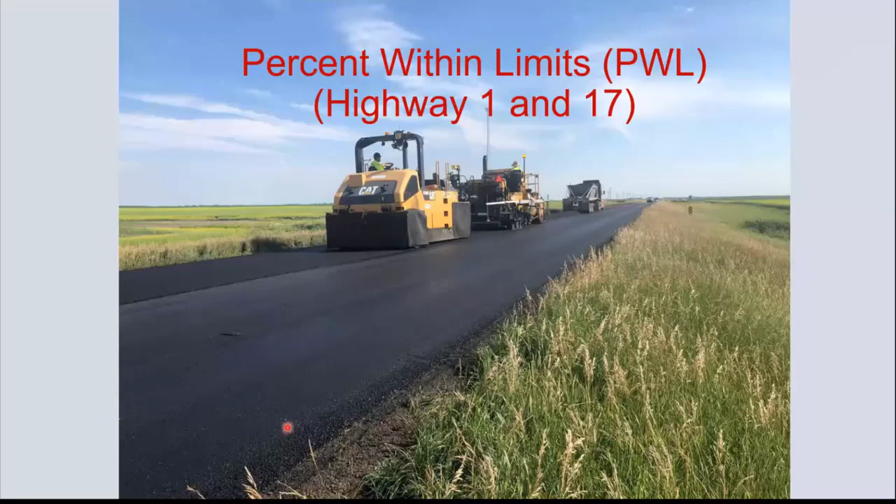Good afternoon. My name is Curtis Dunn, and I work for the North Dakota Department of Transportation in the Grand Forks District, and my position is the Highway Material Coordinator. And I'd like to talk to you today about percent within limits, and it's a new specification that we've tried on a couple of projects now in the last couple of years. And I think it would be interesting to go over some of those things that we learned for those who are going to have a project with us in 2023.

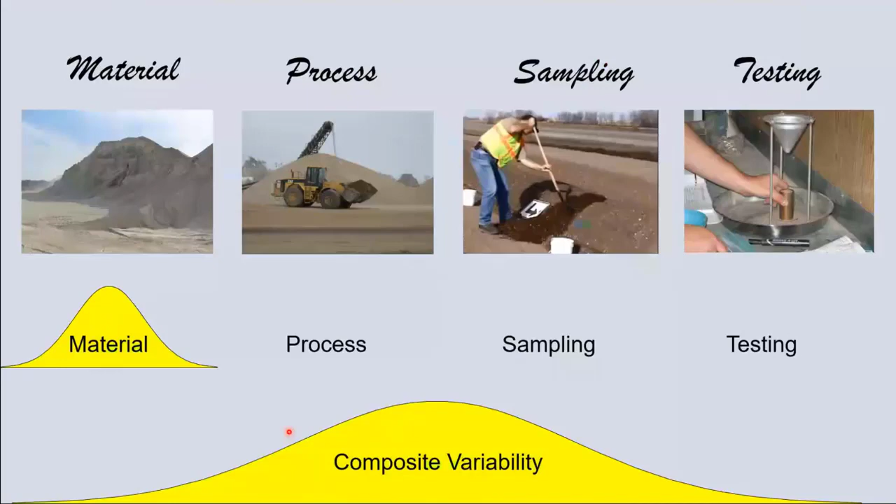To start out with, in anything we do, especially in civil construction, there's some inherent variability, and it's in the raw materials that we have in our gravel pits and in our quarries. And there's variability introduced into the process when the contractor actually starts to process the material so that it's suitable to go in our projects. And also the testing that we do, there's always a little bit of variability, and also sampling. So when you take all those four things, it actually adds up to be a fair amount.

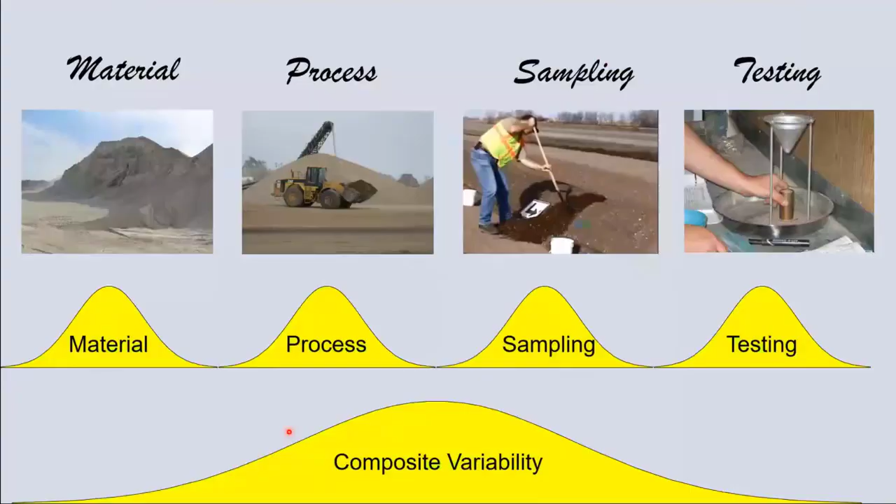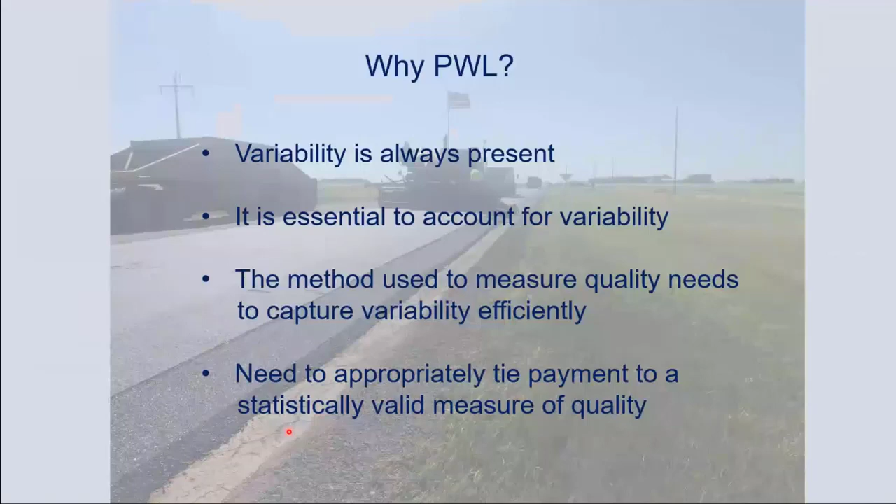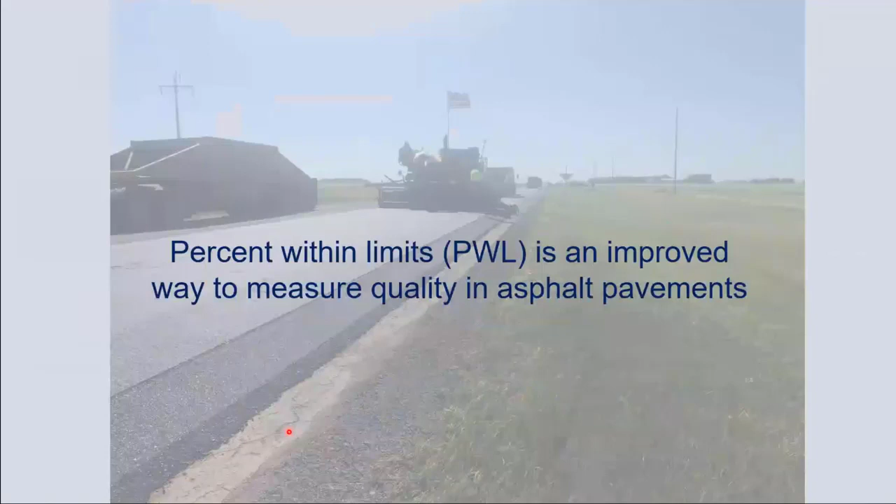And so with that in mind, since there is variability present, it's essential to account for it, to be fair. And the method to measure quality needs to capture variability efficiently, and it needs to appropriately tie a payment to that statistically valid measure of quality. And so that's where percent within limits comes in, because everything is under a normal distribution, and percent within limits works on that basis. And so it's an improved way to measure quality in asphalt pavements.

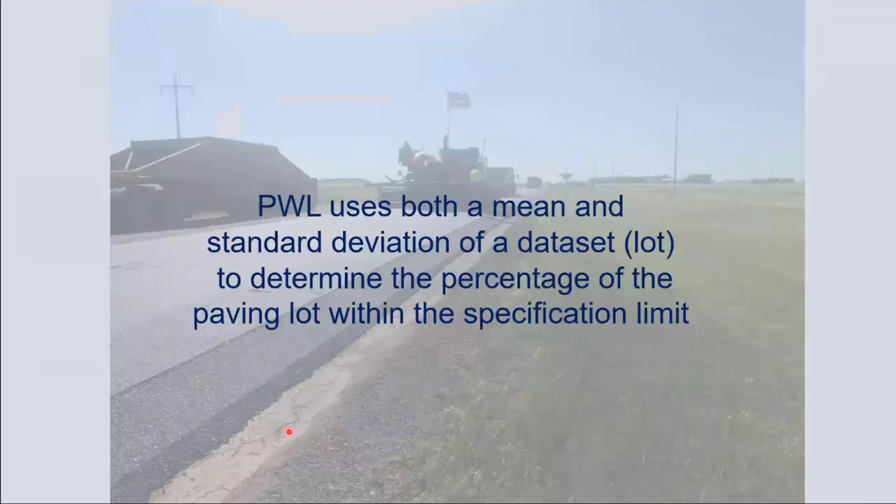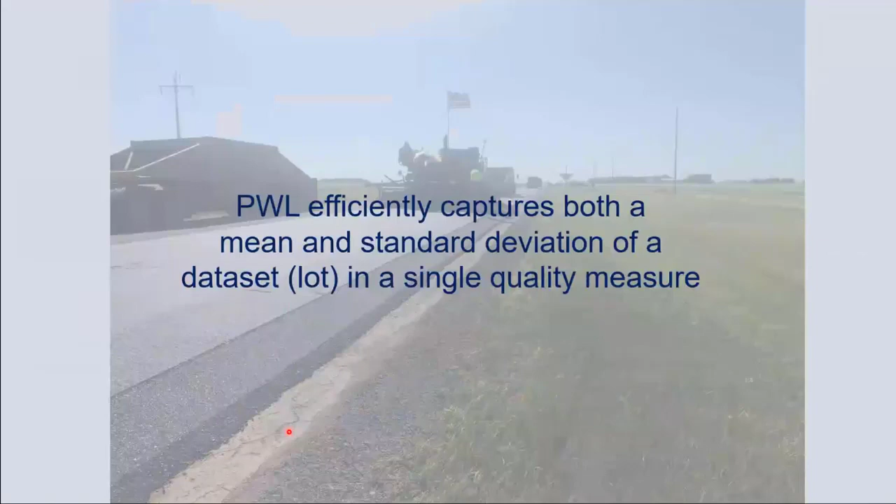PWL uses both a mean or average and standard deviation, which is the range of your data, of a data set, to determine the percentage of the paving lot within the specification limit. It efficiently captures both in one pay factor and in one formula. It captures both the average or mean and standard deviation in a single quality measure. A PWL specification encourages the contractor to produce a more uniform product.

So not only do you want average, which for years now we've been working with averages, but it really doesn't tell you too much about the quality or the uniformity of the product. What it's really doing is trying to keep that standard deviation very low, but also have a very good average as well. And so it actually encourages the contractors to produce a more uniform quality product, and it offers rewards or penalties depending on the quality of the work produced.

So as I was mentioning earlier, in a lot of our traditional specs, we always just look at average. And in the past, and this was maybe before incentives, the contractor can receive payment for meeting density when many of the cores could potentially fall below the desired target value. A lot of our projects have 91% density and 92% density. Well, if you can get an average of 92, that means that there could be a lot of cores that are actually under that minimum.

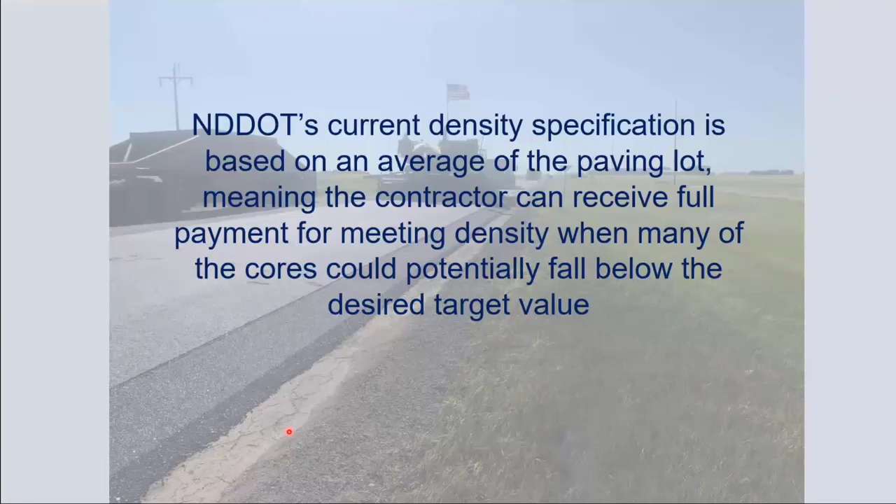The asphalt paving workbook has been now adjusted to accommodate percent within limits projects. And we're not really going to go over the paving workbook per se here today, but I thought it would be interesting to go through some of the calculations just by longhand, just to see what's actually going on and what the paving workbook is actually calculating. And there is a special provision. If you have a project this year and there's going to be percent within limits on it, it'll be in the form of a special provision.

And in that special provision, there are not only instructions about the percent within limits, but there's also a set of calculations that are in the appendix, and a table that goes along with it that we'll see a little bit later here. These calculations are actually the exact same ones that the paving workbook uses to calculate the PWL on the projects. So I'd like to go over these briefly, each step here, and actually work out an example that we did on one of our projects on Highway 1 this year.

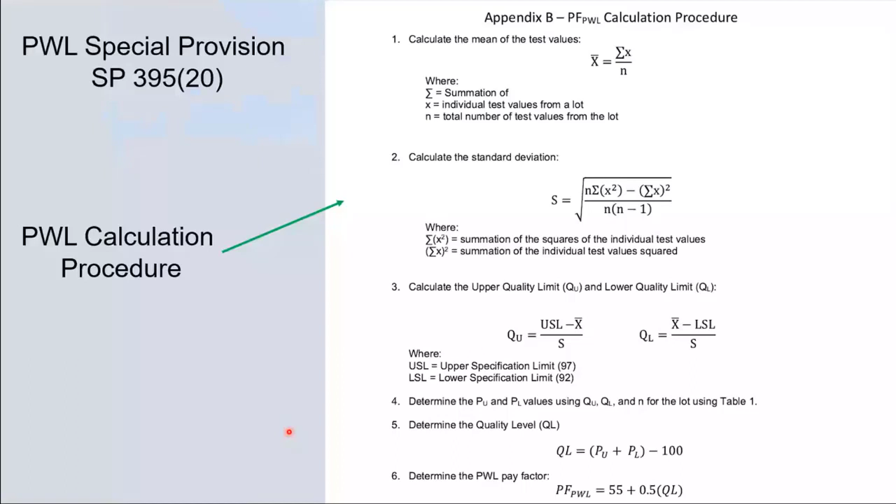And so the first part was here that there's a set of cores over to the right. We had, for a typical day here on August 11th, 21 cores. And so the first step is to actually get an average of those. And basically that's just totaling them all and dividing by the number of cores that were there, and that'll give you an average.

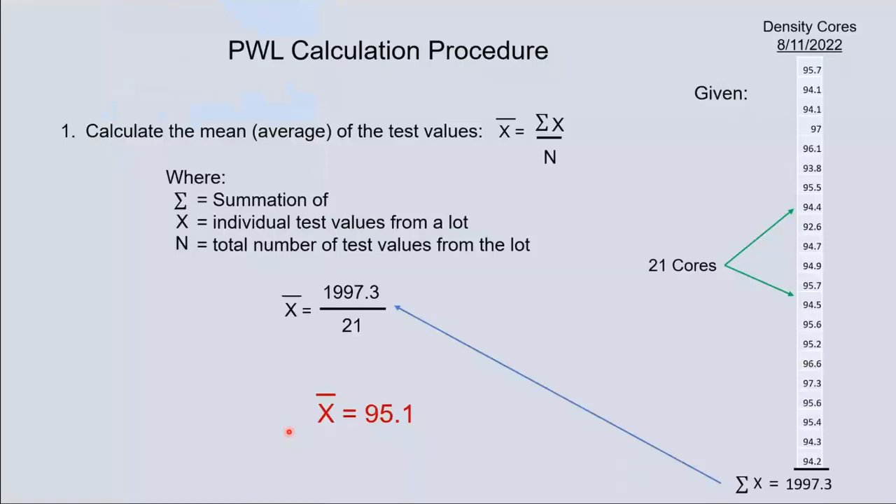The next step is probably the most complex step of the whole process here, getting a standard deviation, and that's basically a statistical formula. You use the summation of the squares of the individual test values. You also use the summation of the individual test values squared, and then you use your total number of test values from the lot. And so you can actually calculate a standard deviation.

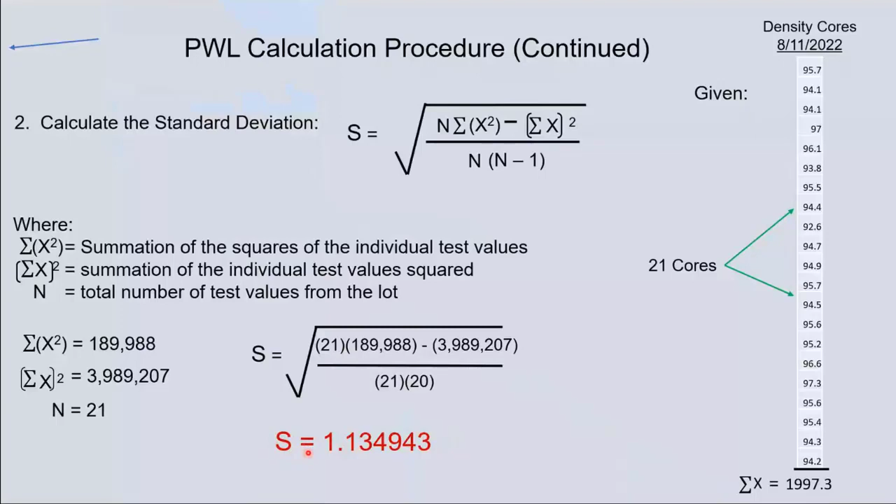And this is really kind of the second part of the whole specification, because the lower you can get this number, the better off you are. If you have a high standard deviation, that means you've got a lot of variability out there, and that's something we're really not looking for.

So once you've calculated the standard deviation and the average of your cores, you can go ahead and figure some of the other calculations. There's what they call an upper quality limit, which is a Q sub U, and the lower quality limit, which is a Q sub L. And in that formula, you actually use your upper specification limits and your lower specification limits.

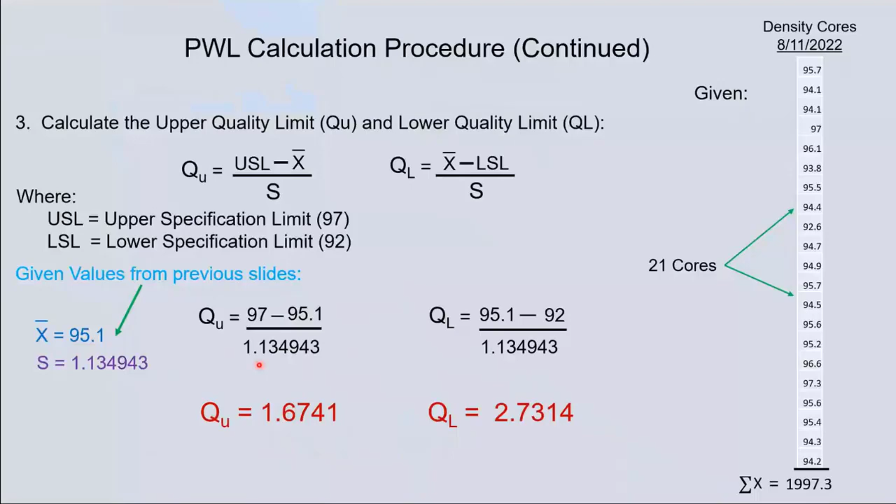Now, for percent within limits projects, the lower specification for density is 92%, and the upper specification limit is 97. So you use these values in these formulas, and you can calculate the upper and lower quality limits. So with that, now you can actually go to a table, and this is a statistical table. This is a pretty universal table for figuring out percent within limits, and this table is also in the special provision.

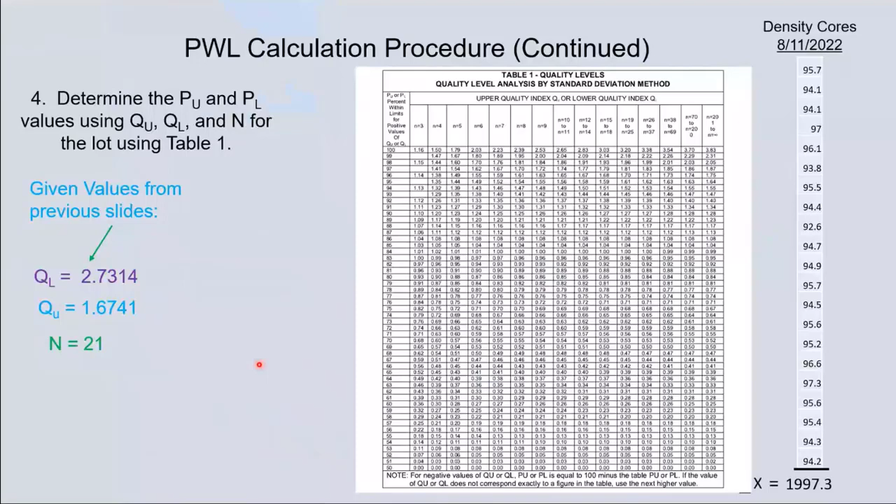And what we're going to do with these upper and lower quality limits is to determine the percent within limits in the upper end and the lower end. It's hard to see this table, so I've made one that was more close up here. So we're going to bring the numbers that we had in the previous page here for the QLs and the QUs, and we're going to take the column here that represents the number of cores we have. In this case, it was 21.

So we're going to take these numbers, the Q sub L and the QU, and we're going to find those numbers on this column, and then we're going to go directly to the left, and that's going to give us our PWL numbers. Now, sometimes they're not going to be exactly 100 or 99. There might be some decimals involved, so you may have to interpolate a little bit on that. So what we ended up with here was a 99.5 and a 95.7.

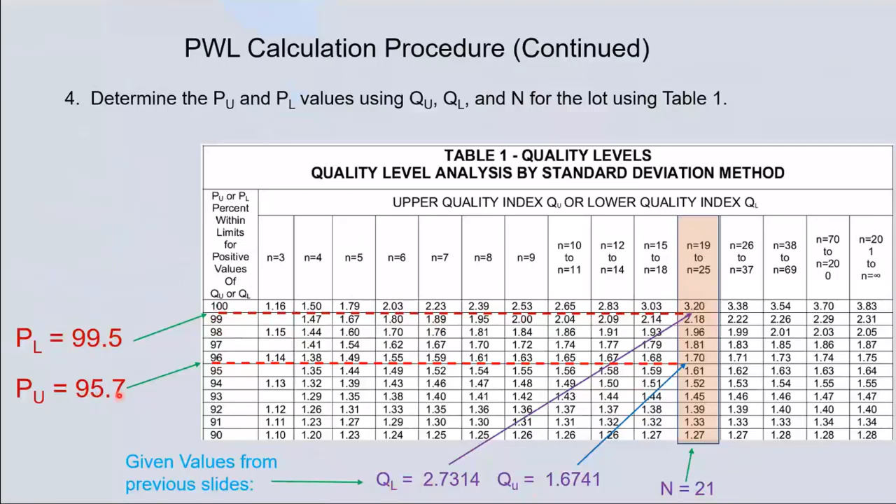So in this case, we're going to plug in the 95.2, and we're going to end up with a pay factor of 102.6. So the contractor for the day is actually going to be getting an incentive for the quality of work that they've done. The most pay factor you can get is 105 as far as incentive is concerned. The only reason the contractor didn't get that here is because one of the cores was a 97.3, and since it was out of the limits, there wasn't as much pay factor.

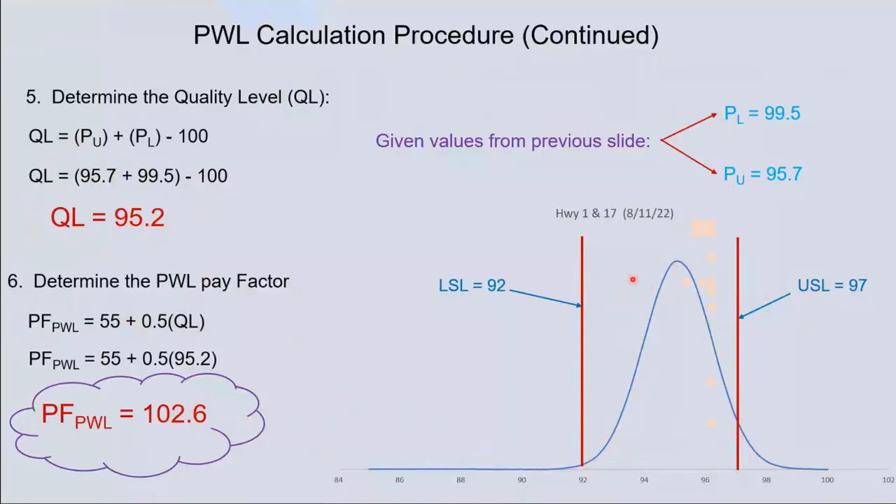And so I think what percent within limits is actually doing is pushing our averages farther to the right, but also still giving us some very good uniformity. If our curves were really close to the 92, the closer you get to either the upper or the lower, you're going to want less variability, as you can see.